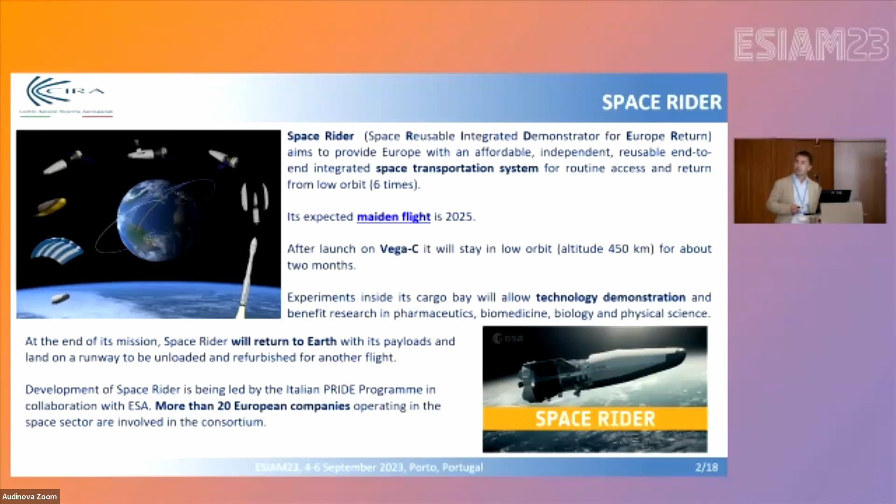The program is funded mainly by the Italian government with the collaboration of the European Space Agency, and more than 20 companies are involved in the project.

In the framework of the Space Rider project, CIRA, my company, the Italian Research Center, is in charge of designing, manufacturing, and qualifying the whole body flap assembly, which is this component here.

We have proposed a hybrid approach, a hybrid design. We use CMC for the control surface and metallic materials for the attachment to the cold structure, the orange components.

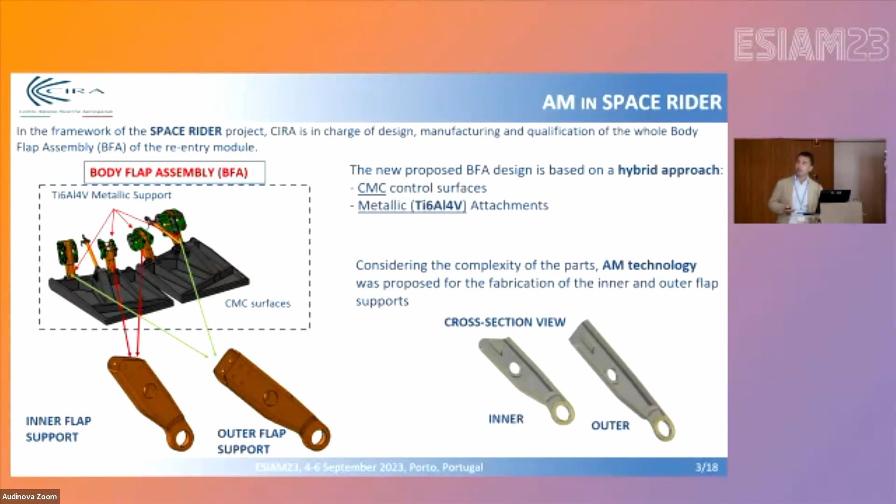In particular, we have proposed to use Ti-6Al-4V titanium alloy for the metallic components, produced by additive manufacturing due to the complex shapes of the parts. There are actually 2 items, the inner flap and the outer flap - the outer is the external one and the inner is the internal.

We have used a standard from ESA for the qualification process. This standard is for powder bed fusion additive manufacturing process for metallic materials and space application. Basically, there are 3 phases during qualification: the definition phase, the verification phase, and the production.

In the definition phase, hardware requirements are reviewed and compared with additive manufacturing constraints in order to define a preliminary manufacturing concept review. Then there is the verification phase.

You can see here a lot of acronyms, but the principle is very simple. Basically, the aim of the verification phase is to verify the end-to-end manufacturing process through 2 testing campaigns, one at the sample level and one at the prototype level.

So the idea is to start from a preliminary additive manufacturing procedure at sample level.

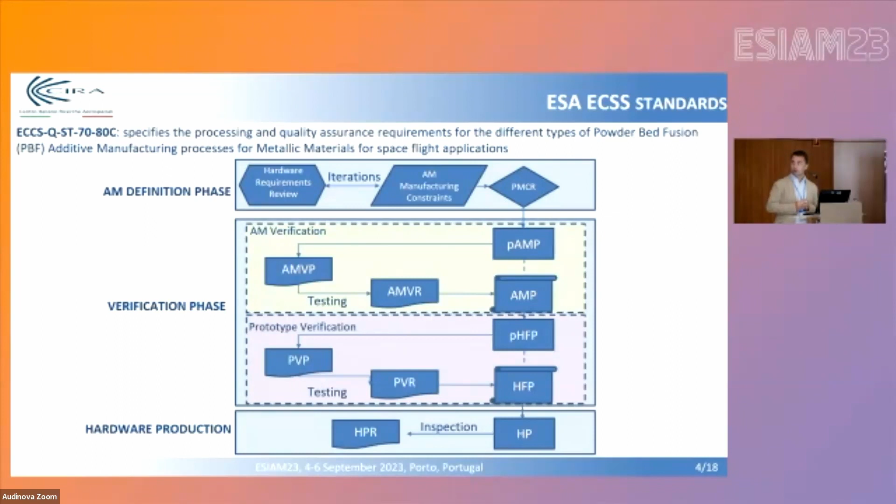When the verification phase is concluded and verified, then the production can be started.

In the definition phase, we have chosen to use electron beam technology as the additive manufacturing technology. At CIRA, we have an Arcam A2X machine.

The main check was about the dimensions. We have checked if the dimensions of the items fit inside the building envelope of the machine, and this was okay for both the inner and the outer, of course.

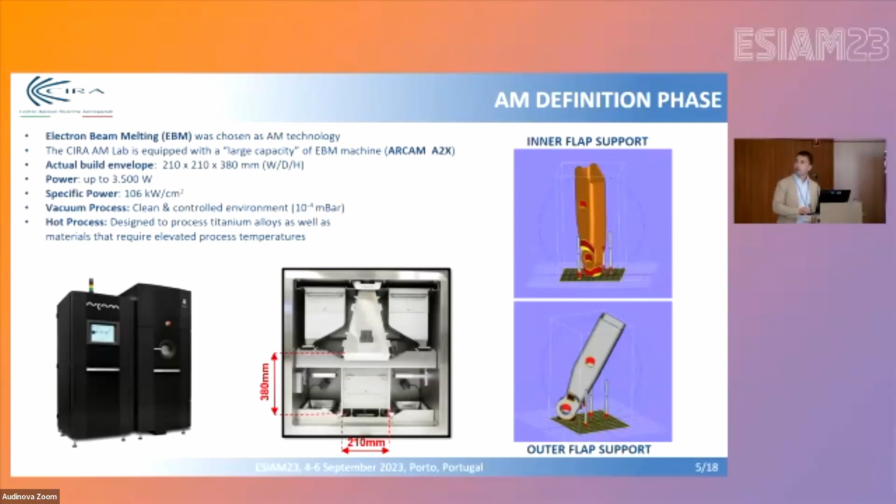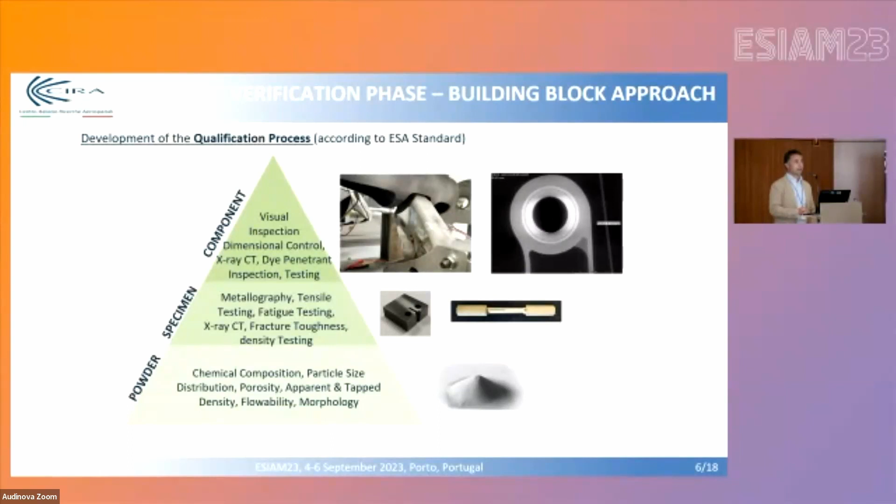For the verification phase, as I mentioned before, we have followed this building block approach, starting from powder, passing from specimen level, and finally concluding with tests at component level.

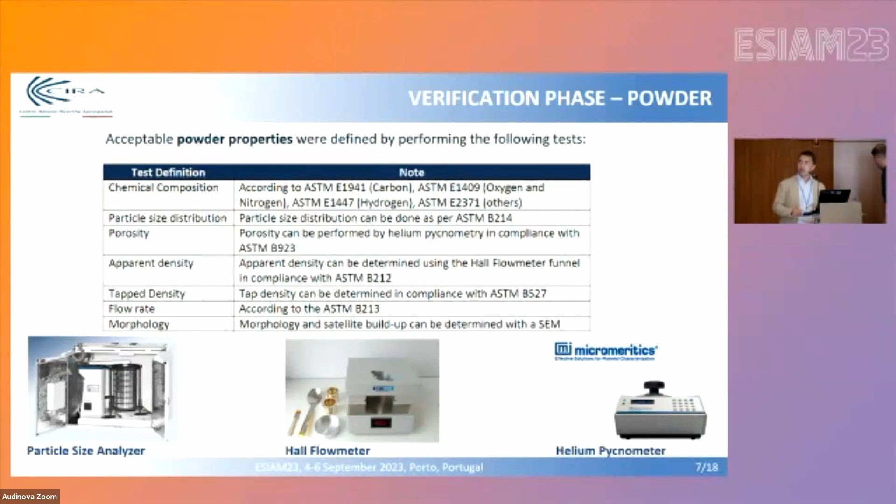Starting from powder - this is a very important step because it is important to define acceptable powder properties, since the quality of the powder affects the quality of the final product. Acceptable powder properties were defined according to the tests shown in the table, in particular in terms of chemical composition, particle size distribution, porosity, density, flowability, and morphology.

Then we move to the sample level verification phase. We have performed an extensive material test campaign - this is just a summary. For more detail, you can read the relative publication, or just ask me.

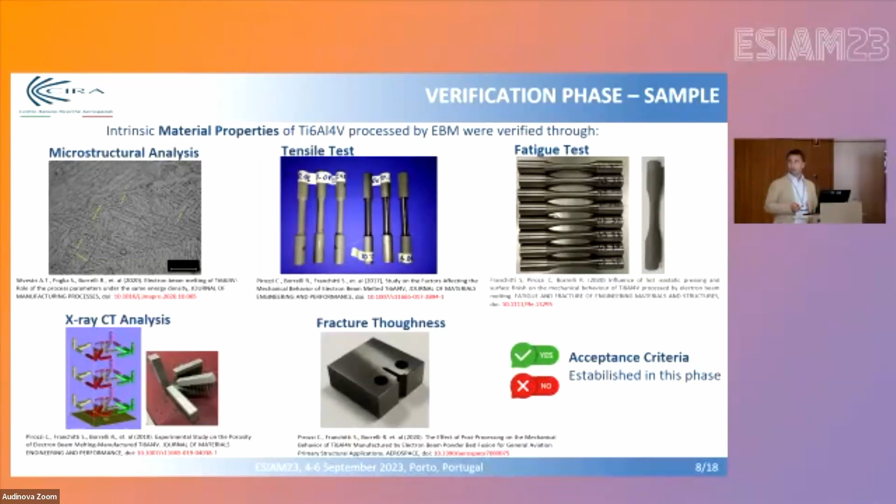This phase was very important in order to evaluate intrinsic material properties of Ti-6Al-4V produced by EBM. These results were used to define acceptance criteria, which were established in this phase.

So we moved to the prototype level test campaign. We have produced two prototypes, one for the inner flap and another one for the outer flap, in two separate jobs.

In each job, we have produced not only the prototype but also some specimens, which we can call validation specimens, because we use them to measure properties like density, tensile properties, or chemical properties. These properties are compared with acceptable properties in order to validate the job.

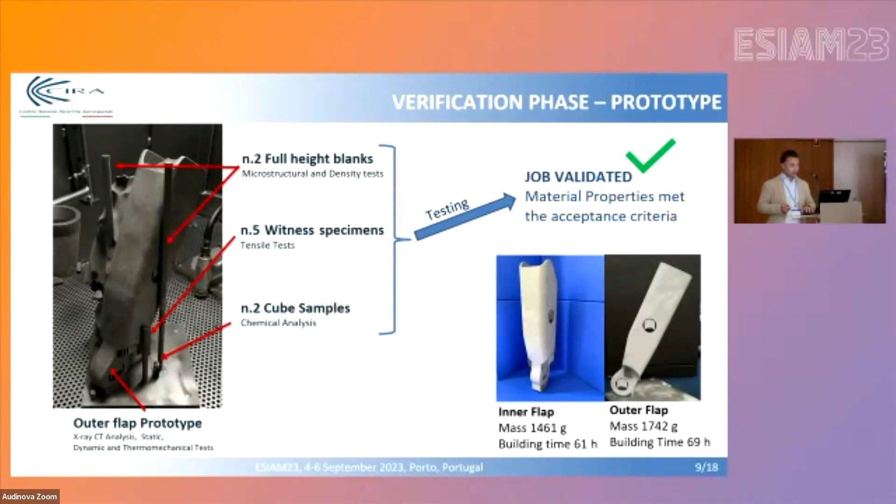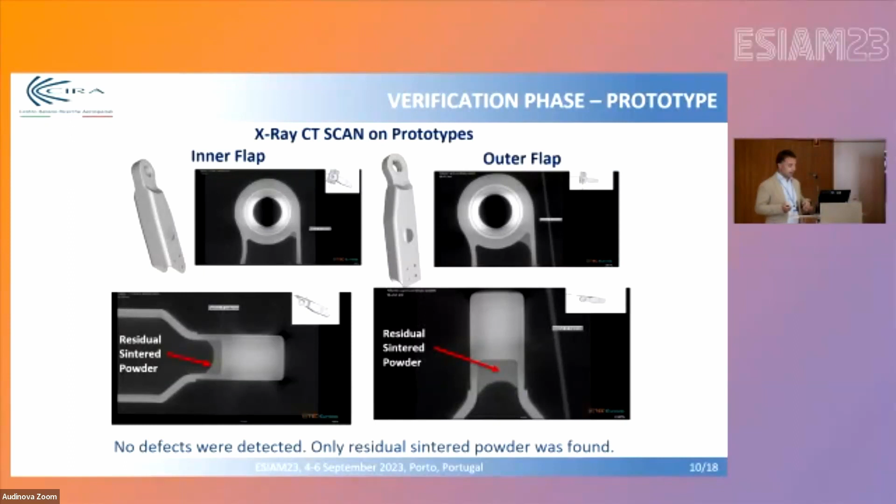The job was validated through testing, and some tests were performed on prototypes. First, we performed some CT scan analysis on prototypes. No defects were detected, only residual powder was found in the internal zone of the prototype, because it is very hard to reach this zone with our cleaning system.

We have also performed a static test campaign. The aim was to validate the numerical model used to design the body flap assembly, but also to evaluate the capability of the body flap assembly to sustain the static aerodynamic loads during the re-entry phase.

So this is the test article. In orange, you can see the additive manufacturing parts. The test article was mounted on a suitable test fixture here, and we used a balloon here, which was put between a flat plate and the test article. The balloon was connected to a compressed air source in order to simulate the aerodynamic loads.

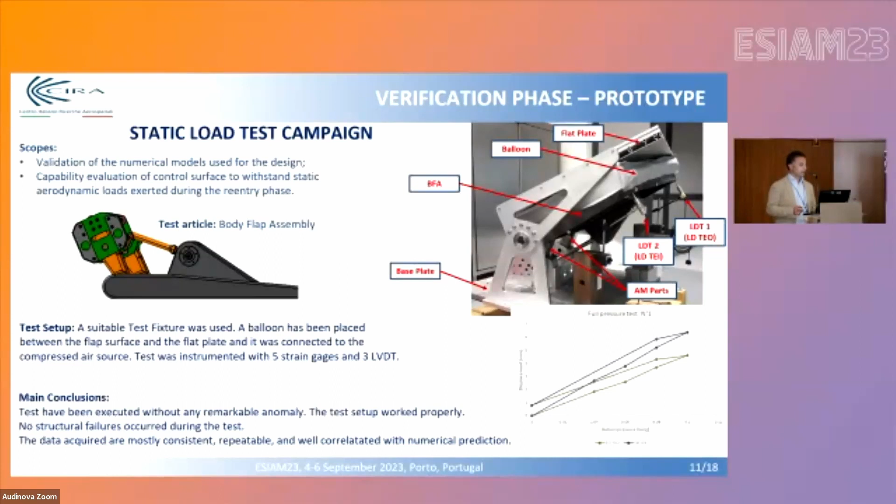The test was instrumented with displacement transducers here and here, and some strain gauges. Here you can see, for example, the displacement at these two points as a function of balloon pressure. The main result of this test was that no anomaly and no structural failures occurred during the test. The test was repeated 6 times on the same test article in order to prove reusability. The data were mostly consistent, repeatable, and well correlated with the numerical models.

We have also performed dynamic tests on the same test article, with the aim of consolidation of the design. We performed vibration tests, this one in particular, using the shaker that we have. We instrumented the test article with several accelerometers along it, and here are the results in terms of acceleration level. Again, the main result was that the kinematic functionality of the body flap assembly was maintained.

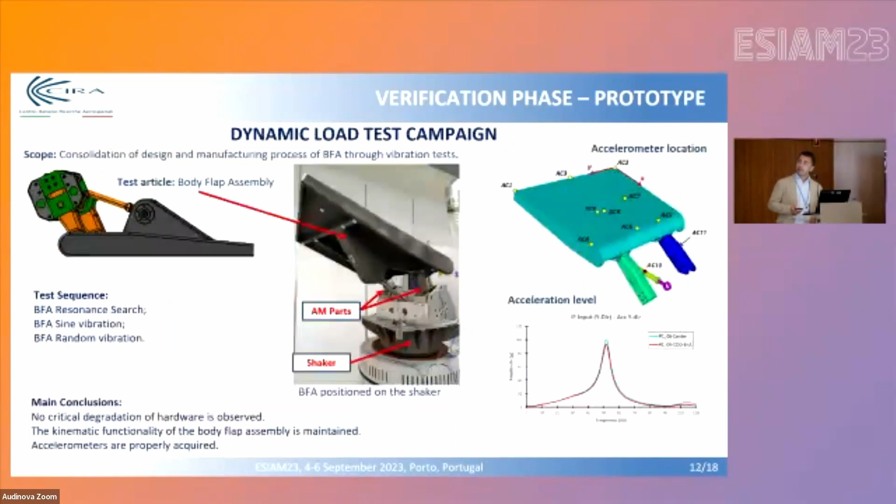Finally, we performed a thermomechanical test on this component, on the outer flap support. One end of the outer flap was connected to a CMC fixture through a bearing interface, and the other end was connected to a metallic fixture. The test article was then put in a furnace.

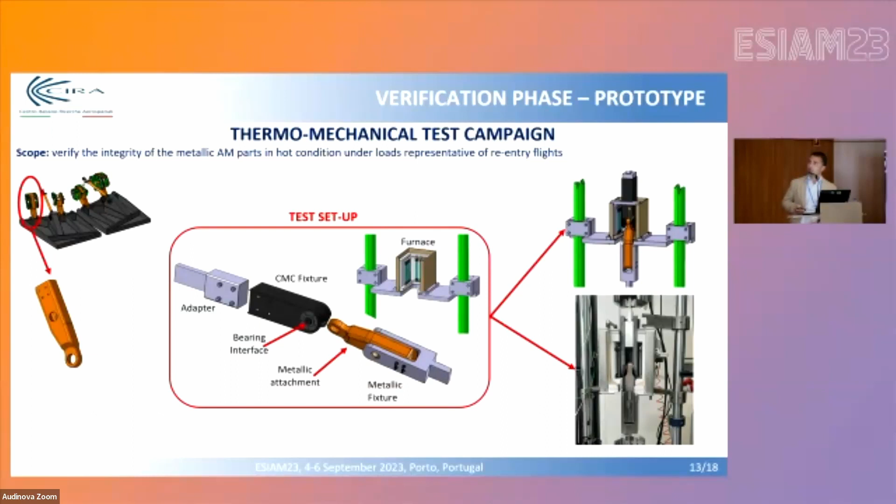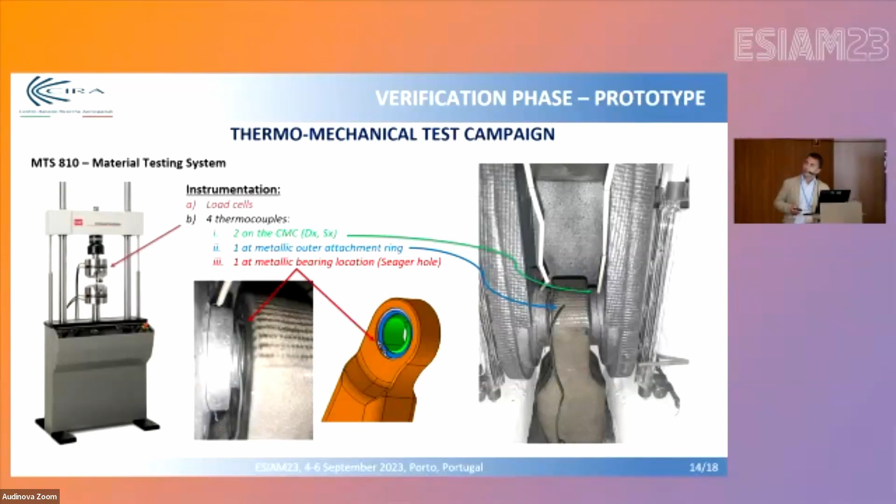Here you can see the digital image and the real image. The test was performed using an MTS machine, and we used 4 thermocouples to measure temperature. In particular, the most important one was the temperature close to the bearing.

The aim of this thermomechanical test was to verify the ability of the body flap to sustain simultaneously the design temperature and the design mechanical loads for a specific duration. You can see here the temperature, shown in the red curve, as a function of time, along with the target thermal loads and the target mechanical loads in kilonewtons.

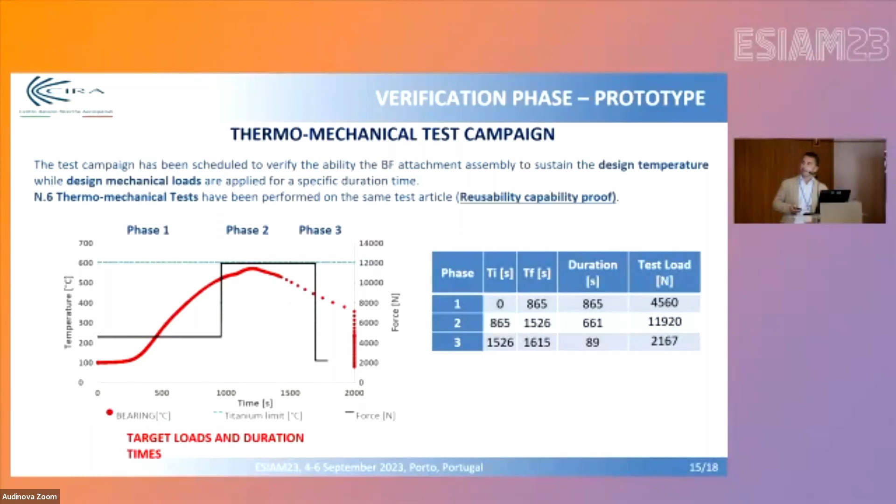These target curves are divided into 3 phases. The most critical one is phase 2, where the maximum load is about 12 kilonewtons and the maximum temperature is about 600 degrees. So these are the results of the test.

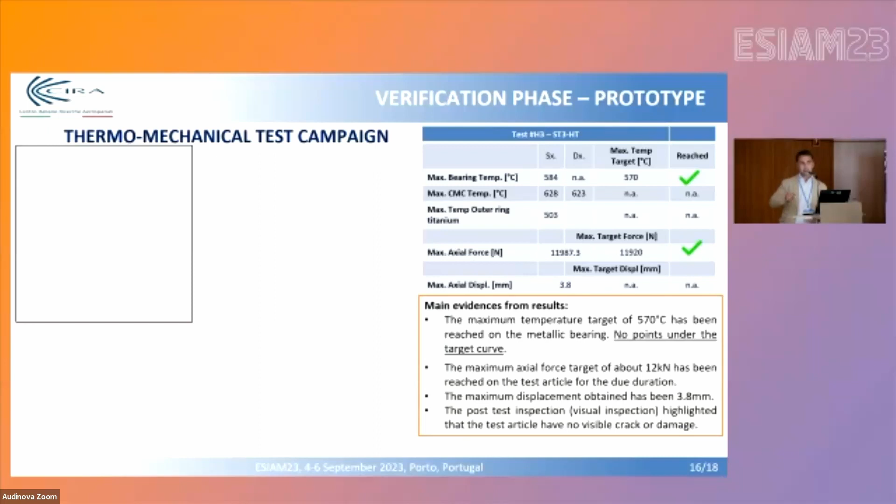I'm sorry, the graph with the results is missing here. However, we can conclude that the maximum temperature was reached by the test, and also the maximum load was reached by the test. So the requirements of the test were fulfilled, and post-test inspection highlighted that the test article had no visible damage. The thermomechanical test was repeated 6 times to prove reusability capability.

As a conclusion, we have used additive manufacturing to produce metallic attachments of the Space Rider body flap assembly. We used a building block approach to qualify the additive manufacturing parts, and we performed tests at the prototype level, including static, dynamic, and thermomechanical tests, to prove the capability of the body flap assembly to be reused for the Space Rider mission.